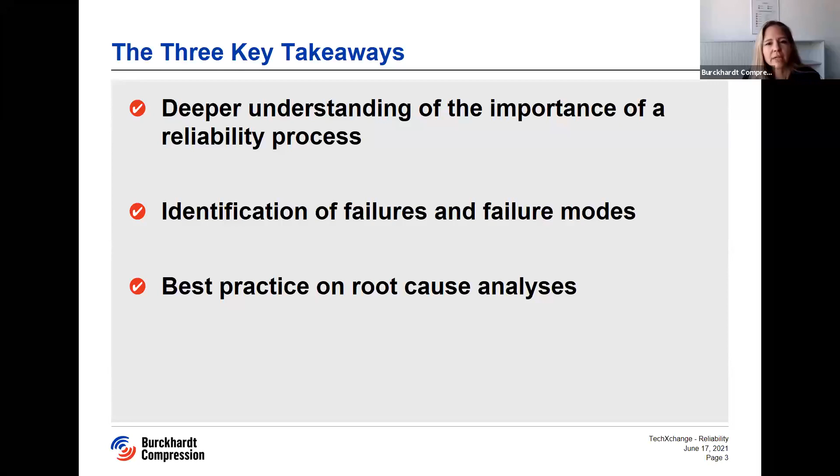In our TechXchange webinars, we give you technology insights on reciprocating compressors. Today we will look into the topic of reliability: how do we eliminate bad actors? The three key takeaways are a deeper understanding of the importance of a reliability process, the identification of failures and failure modes, and best practices on root cause analysis.

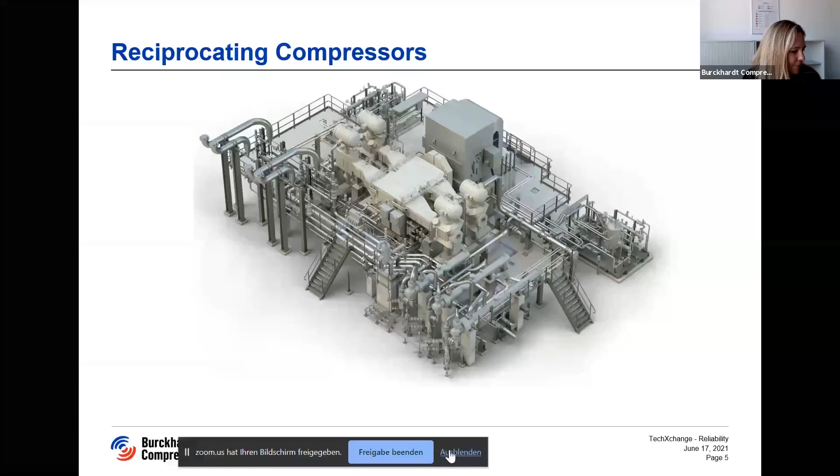Thank you, Daniela. Good morning, good afternoon, good evening. My name is Jonas Gomes. It's a pleasure to be with you here on this TechXchange. So let's start our topic today: reciprocating compressors and reliability.

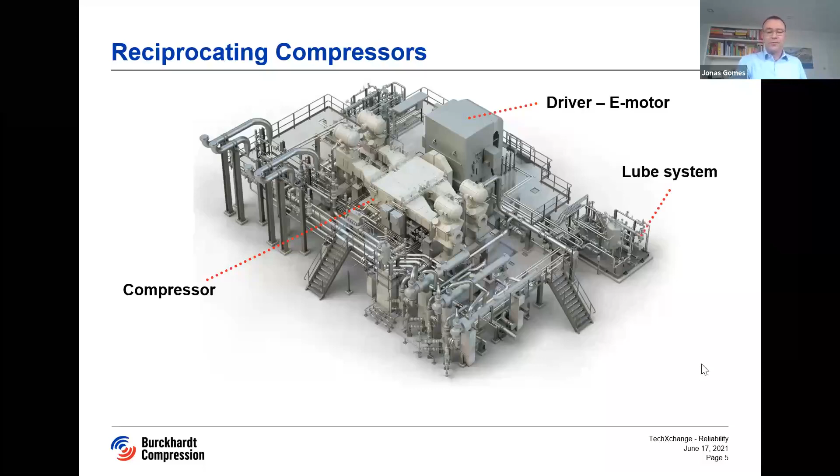Here you see a typical arrangement of a reciprocating compressor gas system. You may see here different components and equipment, let's go shortly through them. The compressor is placed in the middle, responsible for the compression of the gas. Additionally, you have probably a driver, which can be an e-motor or a steam turbine, responsible for providing the torque on the compressor, as well as we have the lube system.

Other equipment that you may see here are heat exchangers, pipings and instrumentation. The reliability of this complete compressor gas system depends on the performance, availability, and reliability of all these systems together. If they are failing, you can probably have some unexpected shutdown or event. So the question about reliability is, how do you deal with the failures of this equipment? If you answer this question, you're probably answering how you are dealing with, or how you are performing, reliability.

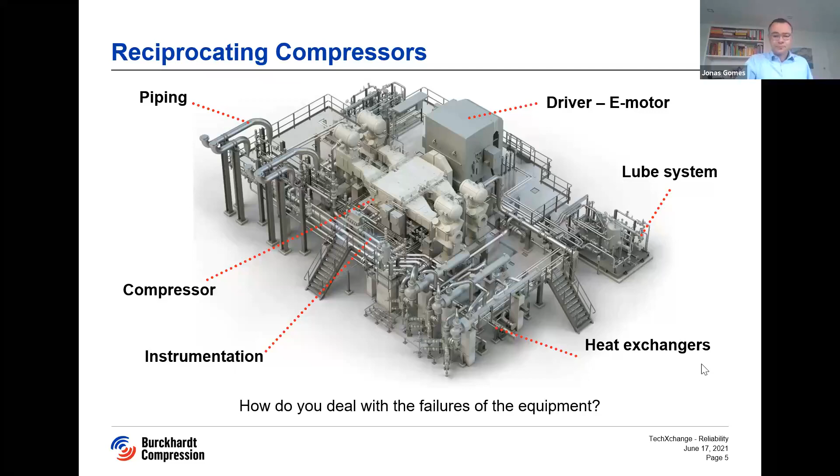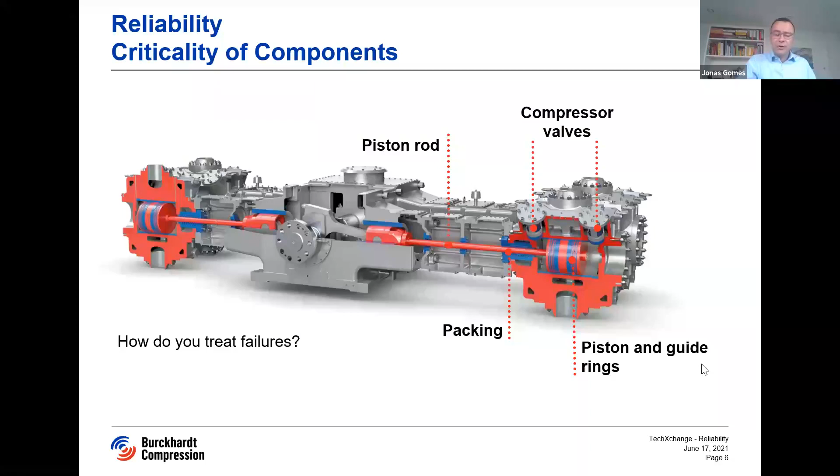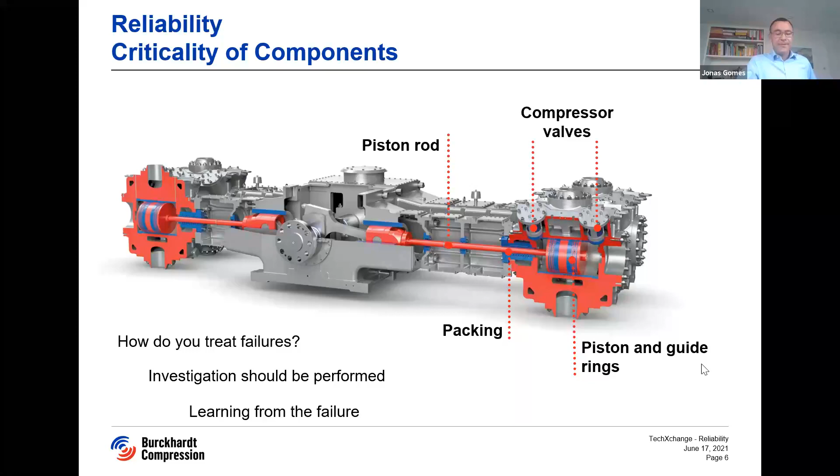So again, let's revert to reliability. If these components are failing, how do you treat these failures? How do you investigate them? To avoid repeated failures, investigation is strongly recommended to understand why these components of the compressor are failing, and learning from these failures is a very good best practice. So if you have a failure, or an unexpected shutdown of the machine, maybe you have an accident, loss of production, or even an environmental impact related to the compressor.

One best practice is investigating that. First, try to identify the disciplines, the dimensions that may be a cause of this failure. One, for example, is operation, production—the process itself can affect and be a cause of that. So try to identify these causes. Another main discipline is maintenance, so how the maintenance was done, the process of doing maintenance.

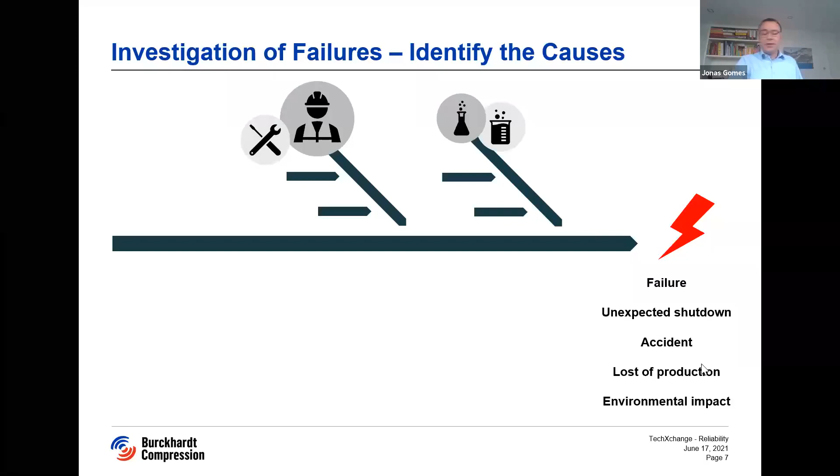The design itself, of the component or of the compressor, can also be a cause of this failure. Materials play an important role in the performance of the machine and should be correlated with the failure. Is there any external factor? For example, weather conditions may also affect the compressor, and any other discipline.

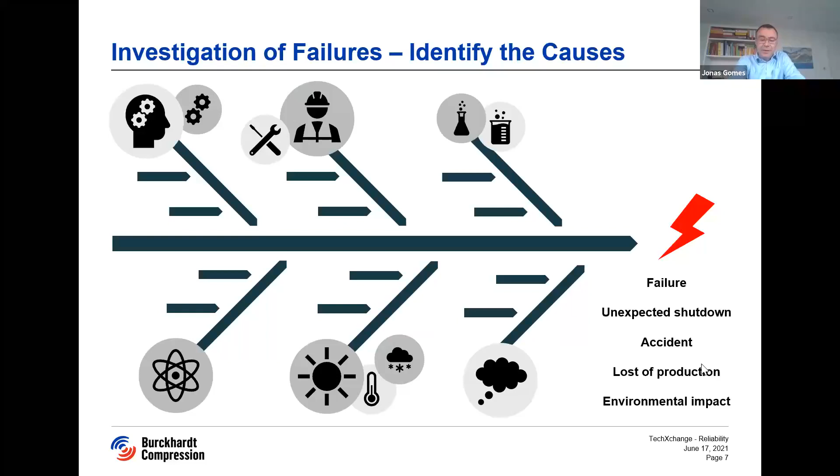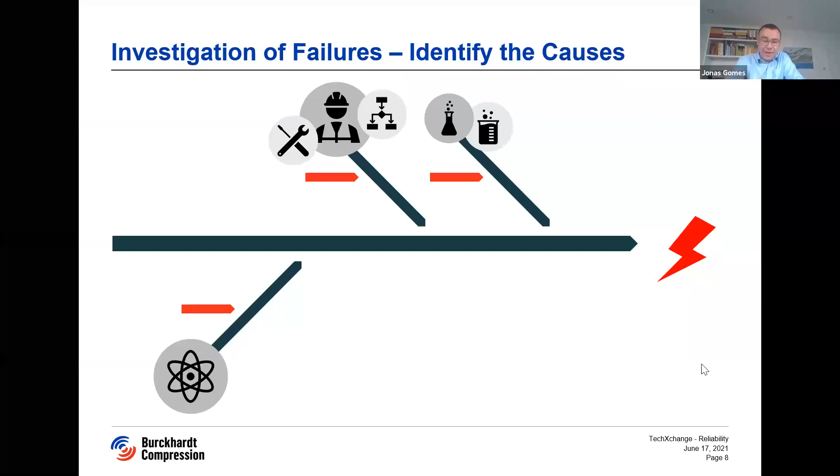So try to inspire yourself, identify these main disciplines, and take note of all these possible causes. Once you go deeper into this investigation and identify the probable root causes of this failure, here we identify in the red arrows just a selection of those. List them, because then you need to eliminate these causes of the failures.

So how do you eliminate them? You should discuss, contact your OEM, contact the specialist, try to define, try to propose a solution, maybe a small change or a minor change on the materials, on the working process, or eventually in the process parameters. Once you implement these modifications, you're going to eliminate the causes and their impact, and for sure, increase the performance of your machine.

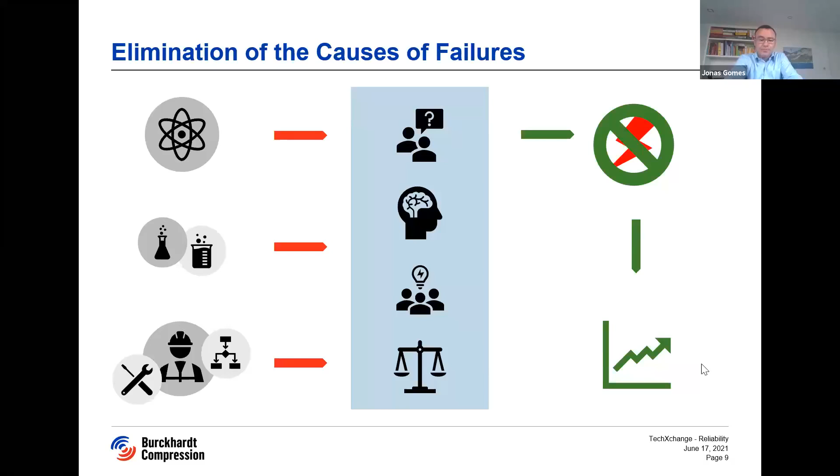Now I'm going to hand over to Vitaly Tatarinov, where he's going to present a nice case of an investigation of a failure on a South African petrochemical plant. Thank you very much, Vitaly. Thank you, Jonas. Good day, dear ladies and gentlemen.

So let me offer an example of failure investigation on a reciprocating compressor. Here the conversation goes about a vertical machine, which you can see on a slide, with a moderate speed, relatively short stroke. It's compressing ethylene in a downstream segment, petrochemical and refining plant, in a dry running mode. So pressure range and temperature range are moderate, very common for this kind of process. And a failure and unreliable behavior here is of sealing systems - that is a pressure packing and piston rings in cylinders of both stages.

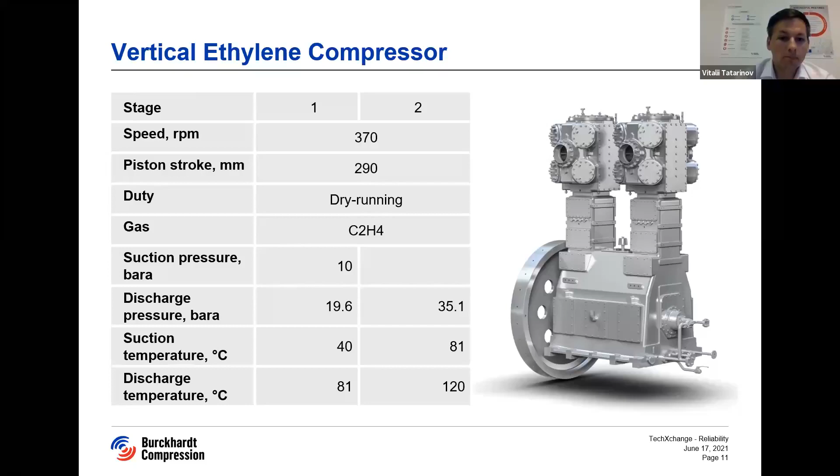So basically, to begin with, we have to identify a problem - what exactly are the descriptions of unreliable behavior. And here, for this particular compressor, responsible for unreliable behavior is a sealing system with a very short lifetime operation. So as short as 3 months of operating lifetime has been reported for piston rod packing sealing elements and piston rings. Another important thing is that high leakages have been observed during operation in the compressor. Last but not least, a noticeable effect is wear of the counterpart surface. In this case, piston rod surface quickly lost roughness and got polished after a short time in operation. So this is basically a general description of the problem.

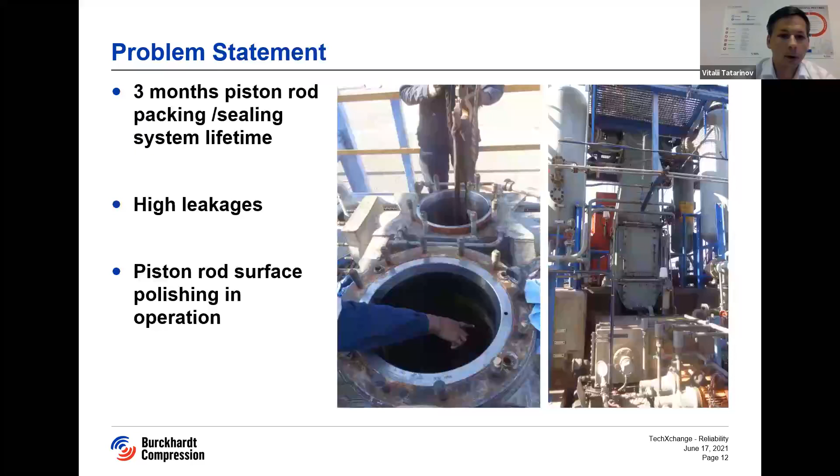However, as a next step, we would need to go deeper and collect facts about the problem. So in this case, we went with a detailed site survey with an inspection on site for the compressor, which consisted of several main pillars. One of them was measurement - measurement inspection on compressor parts which are involved in unreliable behavior. That is liner condition, rod condition with measurements, as well as some characteristics, parameters of the counterpart surface like roughness. All these things have been measured and reported for future failure investigation.

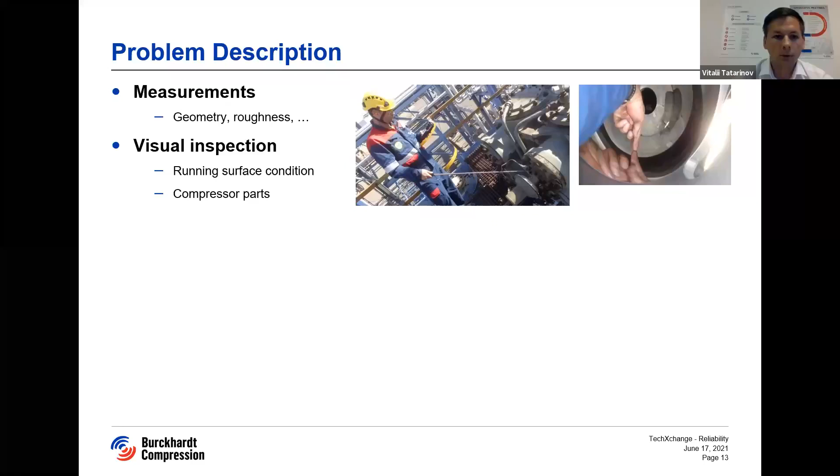Next important step is basically visual inspection. This includes a walk around check around the working machine, looking and observing parameters, as well as inspection when the compressor is disassembled, so we have access to the failing parts. Third one is maintenance documentation. And in this case, it provided a valuable source of frequency of the failures which have been observed, maintenance interventions related to the failure, as well as a record of design changes which have been introduced to the machine, which actually contributed significantly to analysis of the failure causes.

Last but not least, it's a meeting and discussion with technical specialists on site. This involved maintenance and mechanical crew of the compressor operator as well as process specialists. This is absolutely necessary to understand the operating and maintenance context of the compressor, because it forms a separate category of possible failures, which can be shown later on. So this time is really needed to get an accurate and complete problem description and collect the data about the failure.

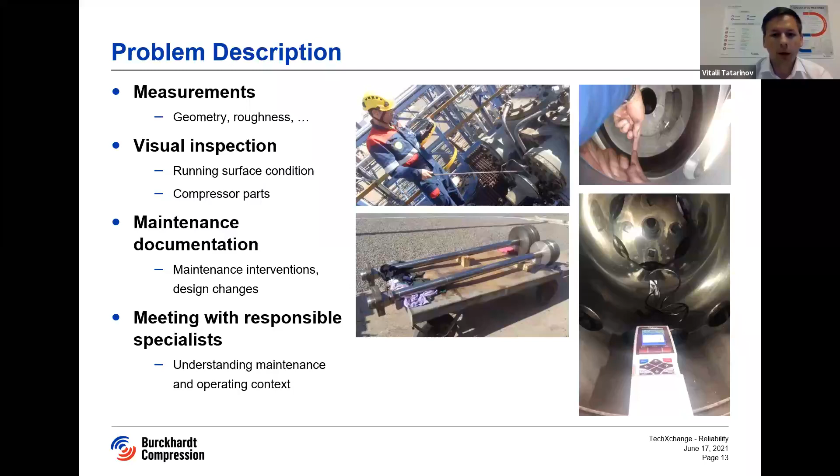If you speak about sealing material of piston rings or pressure packing sealing elements, we can look at whether stiffness of this material is not too high, if it allows sufficient adaptability of the rings when wear comes in, and if hardness of this material is not too high, causing accelerated wear of the counterpart surface.

If creeping resistance or chemical resistance are sufficient and are not responsible for failures which we observe. If you go to the sealing element design itself, is the quantity of rings optimal for this pressure range, for this application, for this molecular weight of the gas? Is there a function principle for how the ring behaves during operation, how it responds to wear?

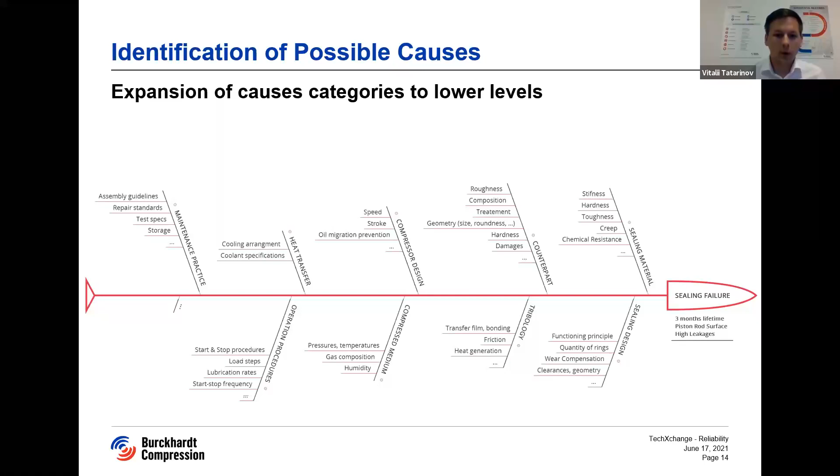So basically, having expanded this tree and listing all possible causes, it's important to say we really try to list all possible causes which can potentially lead to the observed picture of failure. We do not try to eliminate these causes now or challenge them in a hard way. This should be done in the next step.

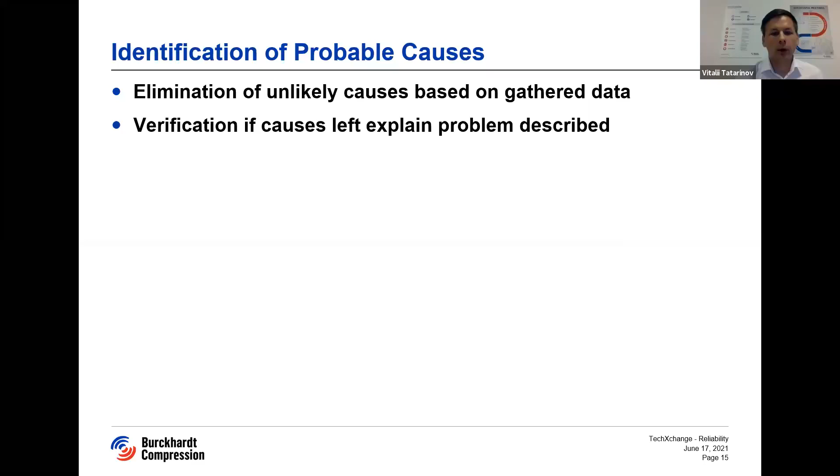So once we've collected this tree and constructed this fishbone, we can start identification of probable causes. For that, one by one, we need to eliminate the causes which are unlikely to be causing this failure behavior based on the gathered data. So here, having this tree, we start to eliminate causes based on things that do not explain the observed effects - they do not provide a mechanism which can explain the observed picture.

And once that's done, once we cross out one by one all these unlikely causes, we remain with something which is left, which is tested to see if this hypothesis describes the behavior which we see. It's basically important at this point to have an explanation.

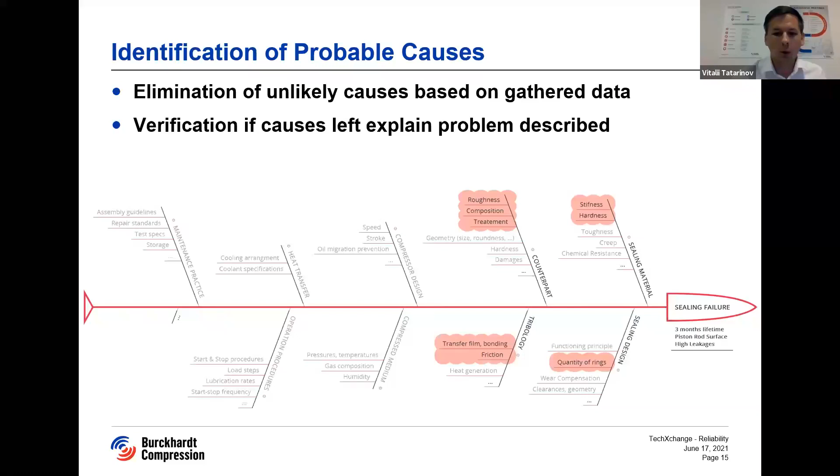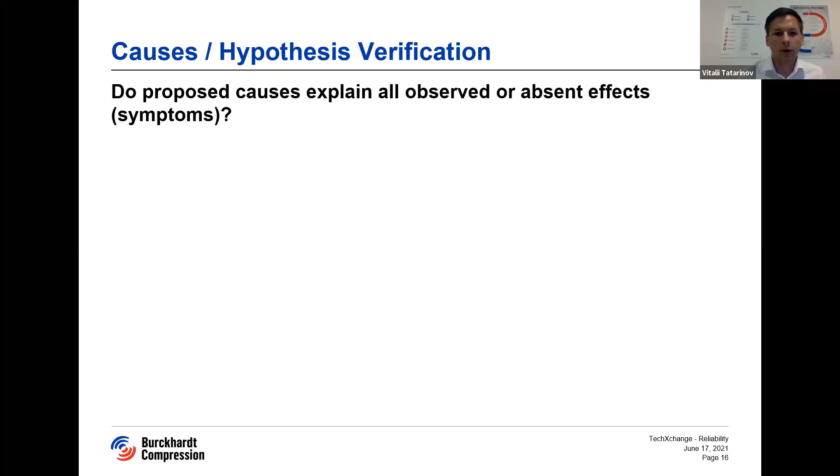On one side, does the proposed cause explain all observed facts? And on the other side, it's important to say that these causes should not imply some absent effects which we have not seen on the machine, but would definitely come as a result. So challenge these causes and really try to make a link from them to the effects which you have seen during the problem statement and problem description.

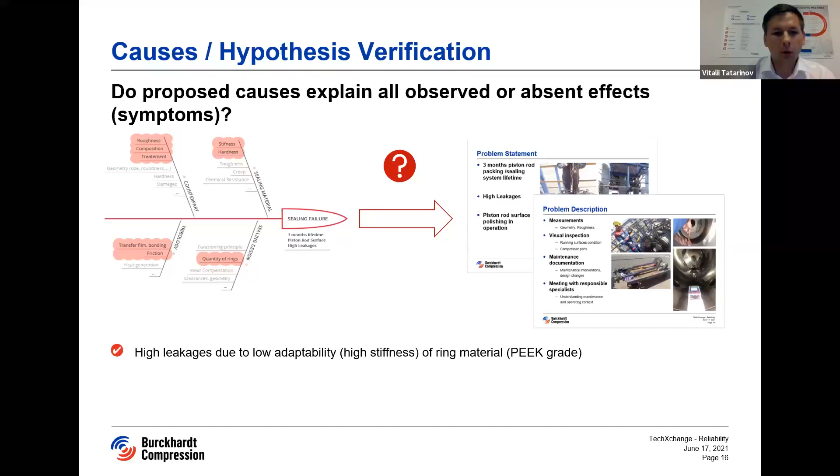And in this case, we are left with material condition or specification and counterpart condition and design parameters. Let's say in this case we need to ask, does it explain all the symptoms which we have seen? And we can say yes, because high stiffness of the sealing material does not allow good adaptability of the rings when worn - one can observe high leakages in operation.

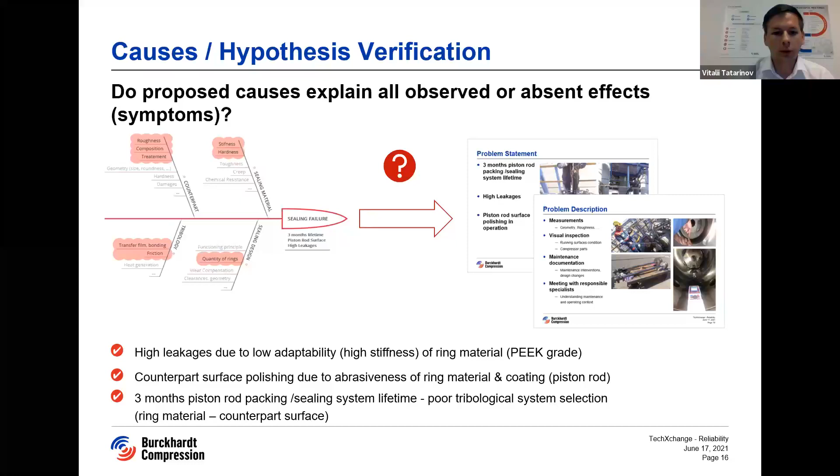Counterpart polishing is a result of higher abrasiveness of the ring material, which in this case was a PEEK grade, definitely not the best choice for moderate pressures and a dry running sealing design as in this case. Altogether, this mismatch of counterpart and sealing element was responsible for the short lifetime of operation, because matching of the tribological system was definitely not optimal.

Next, once we have listed these causes, we can move to improvements and introduce actions on the machine. So in this case, of course, the first step was to change the material of the sealing elements.

Instead of PEEK grade, which was not suitable for this operating range, we selected a polymer blend material, which allows much higher adaptability. It's much less abrasive to the counterpart surface, causing on one side good lifetime, and on the other side, good sealing characteristics of the system.

Another part was counterpart surfaces, so piston rod coating was updated, its roughness has been changed, as well as our cylinder liner roughness has been changed in order to have a proper behavior of sealing system for a dry running application. By saying that, we mean that roughness should be in a specific range to form a so-called transfer film of polymer material on a counterpart and switch the mode of friction from polymer-to-metal to polymer-to-polymer, which is much more favorable for a dry running application and is desirable.

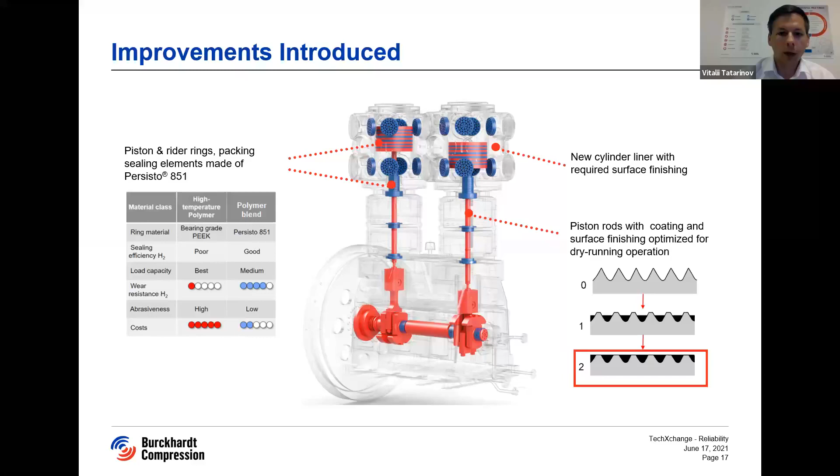So with this complex of measures, we could achieve a much better performance, and it will be shown on the next slide. But before that, I would like to summarize the process which we have applied in this particular case.

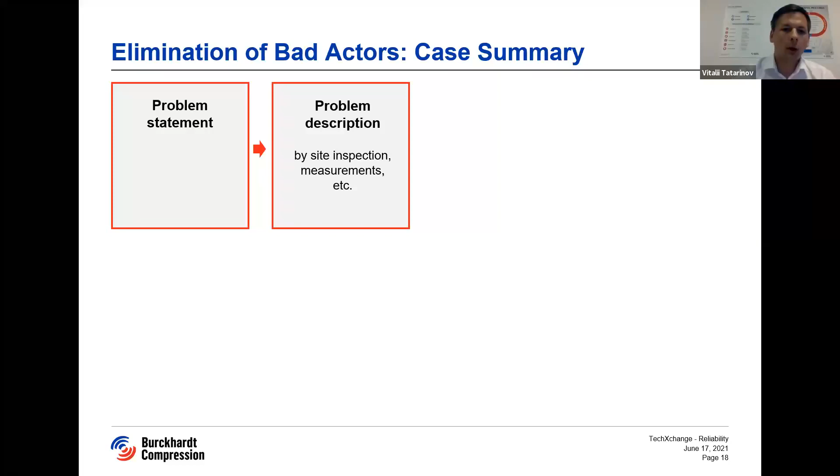So we started with a problem statement, with understanding what actually is wrong, why we consider the system unreliable. Then, as a next step, was a problem description with following site inspection to collect as much data as possible for checking the causes, which we would identify if they are probable, if they are likely, based on the symptoms, the observed picture, on the next step.

Once we have listed these responsible problems and failures, we need to go and assign appropriate countermeasures. Once they are implemented, they of course need to be followed up.

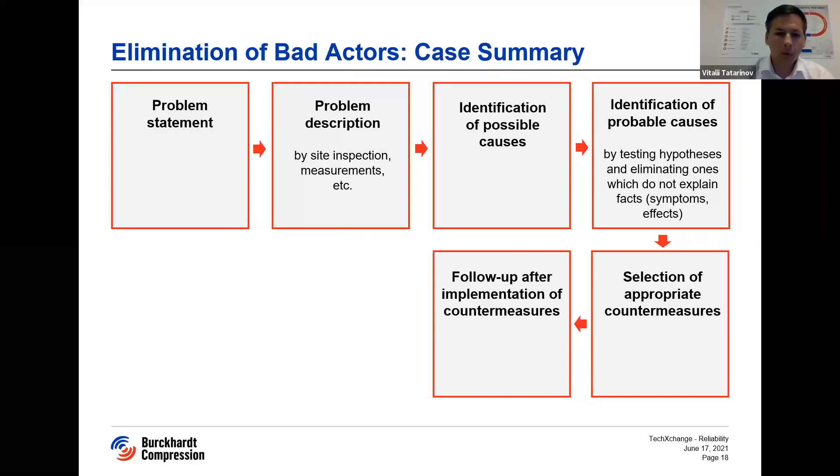So what has been done in this case, and the result was actually a proven approach, because from 3 months in operation, now the sealing system is over 24 months in operation. So it allowed multiple increase in the lifetime of the ring.

An important effect of that was also that in operation now the compressor has its original capacity recovered. So it does not decrease with time and operation as one could expect because of poor sealing performance of the pressure packing, namely the piston rings.

So for that, basically, this is a summary of the applied approach.

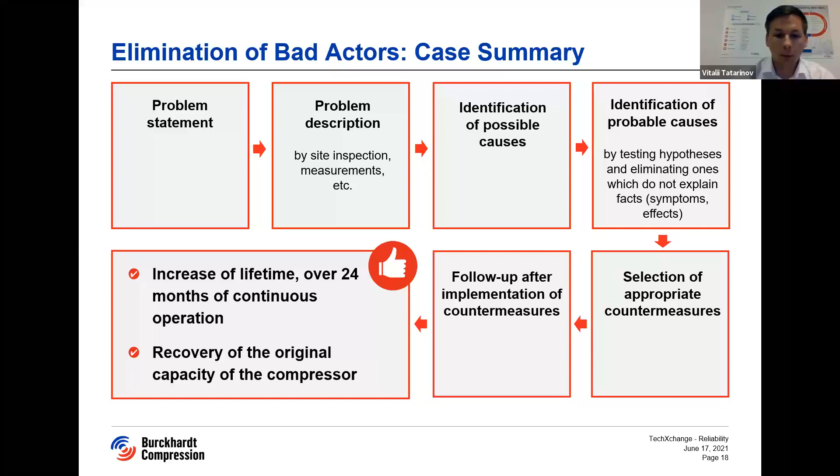And of course, in general, all improvements on reciprocating compressors should be done on the basis of failure investigation. Once bad actors are identified, failure root cause analysis needs to be done with identification of causes, because only by understanding this process can one actually get insight and come up with corrective actions. Because in the end, sealing system performance defines the performance of the overall compressor, and the compressor defines the performance of the plant, its reliability and availability.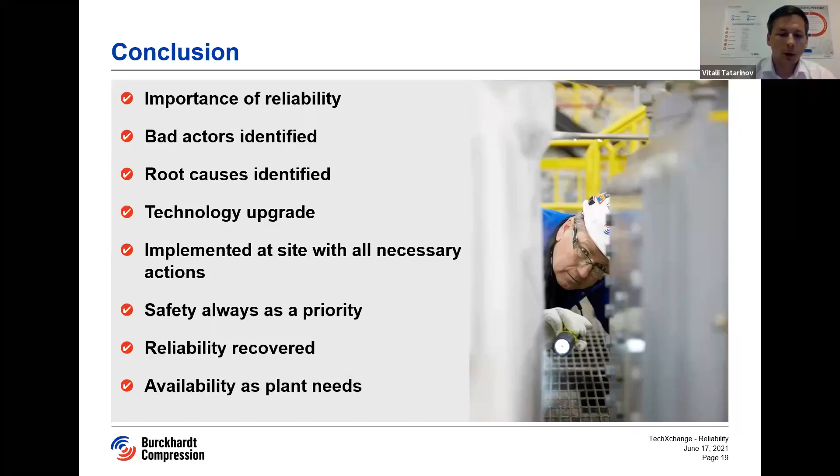So with this, I thank you for your attention, and I give the word to Jonas for a Q&A session.

Okay, Vitaly, thank you very much for your great explanation about this case in South Africa. So let's have a look at the question box here. Vitaly, I think the first one is for you.

How important was the collaboration between you and the customer's process team during this investigation, during this specific case?

Yes, I would say at least as important as cooperation with mechanical and maintenance specialists, because compressed gas is a very important source of potential behavior or causes of sealing system issues. So impurities coming in the gas, process variation, all these parameters must be considered during failure investigations. Therefore, it was a very important discussion which we had in this case to eliminate possible causes.

Thank you, Vitaly. There's another question here. Maybe I can try to answer. What are the risks of not applying the reliability process for investigation of failure? So if I understand, it's like, what are the risks of not doing a proper RCA or investigation of this failure?